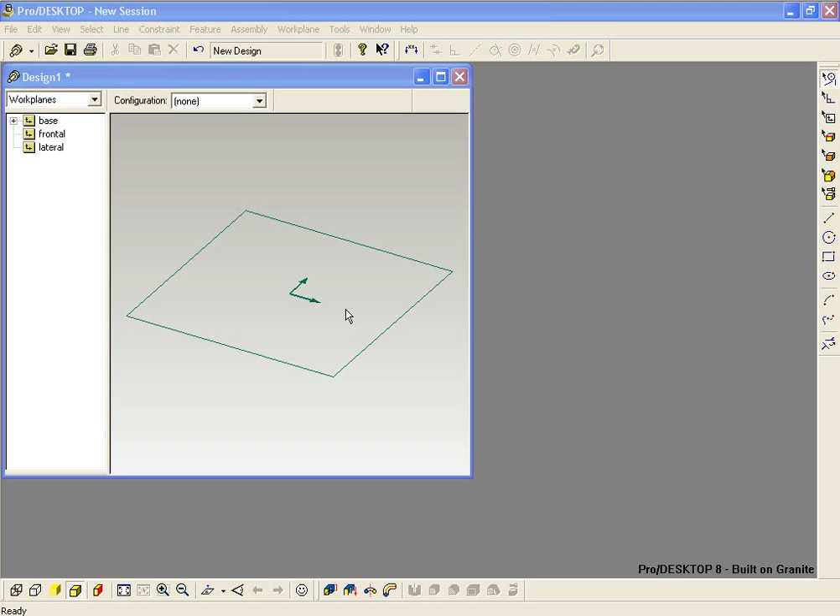First, make sure you have your options set to millimeters. I'll go to units, millimeters, and we're good to go. I'm going to move pretty fast in the initial setup since a lot of it is not new.

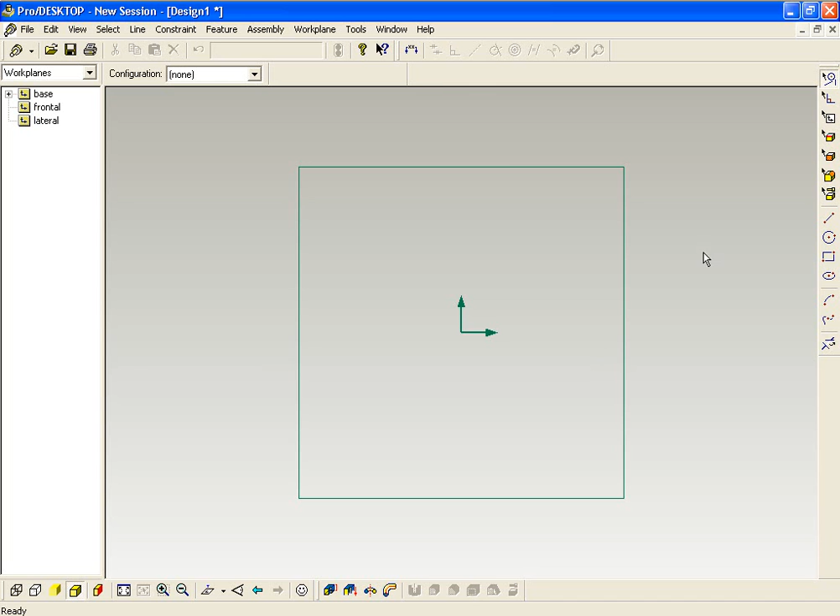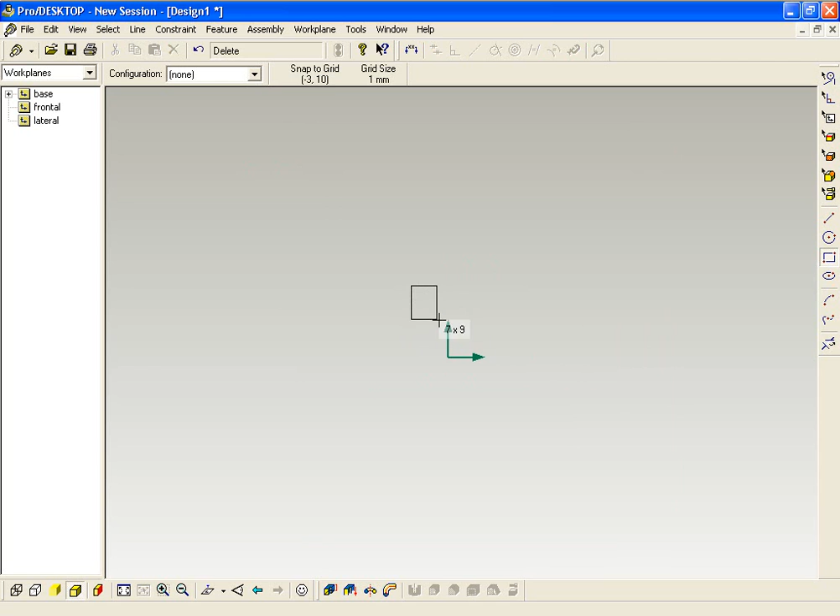I'm going to draw a 16 by 16 millimeter block. Actually, let me Control Z and delete this to show you a different method. I'll zoom in, go to the rectangle tool, and watch the counter. When I get to 16 by 16, I'll stop. It's actually a quicker method.

I'm going to extrude it up 10 millimeters. There we go, bada bing.

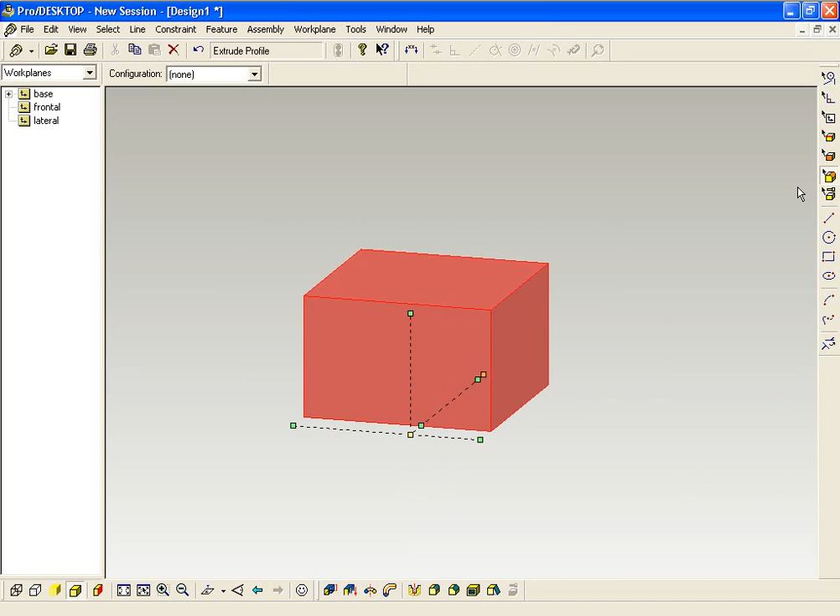The easiest way to take that corner out is with a chamfer. Pick edges, go down and pick chamfer. You're going to do an unequal setback: the top one goes back 8 millimeters, that's the midpoint, and the bottom one goes down 9, leaving a millimeter for the little tiny lip you see. Then hit OK.

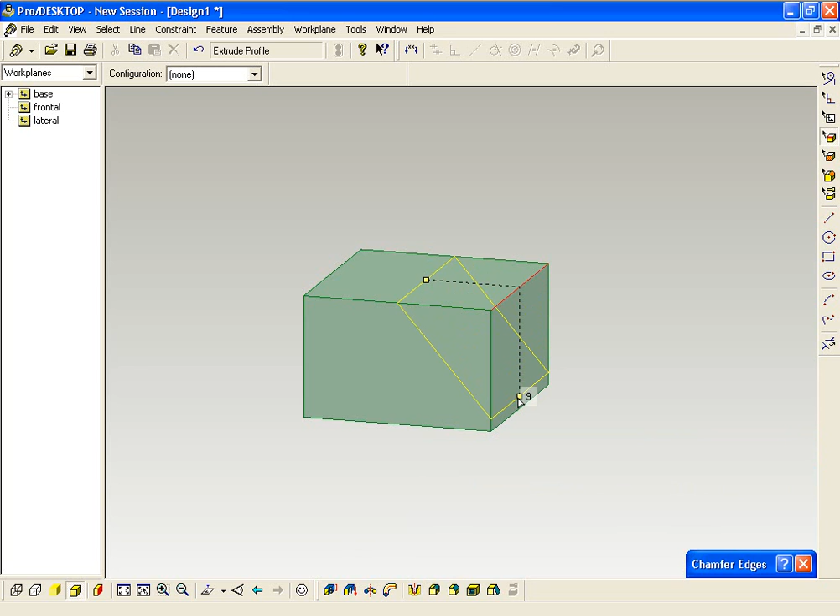That'll take out that front corner.

I'm going to pause and put the dots on, and we'll come back since you've already seen how to do the dots. Okay, and we're back. Just in case you need a refresher, I did two construction lines on an angle to the midpoint, then threw up the 5 millimeter circles.

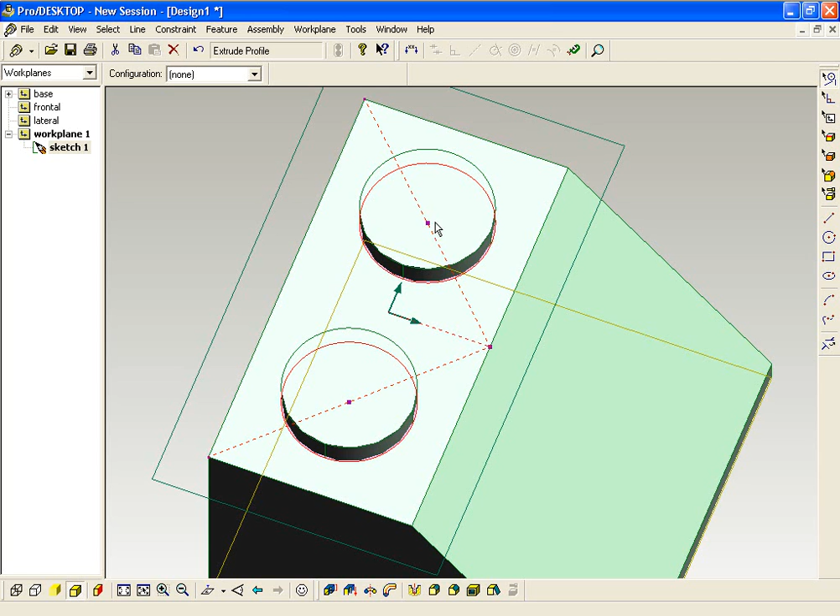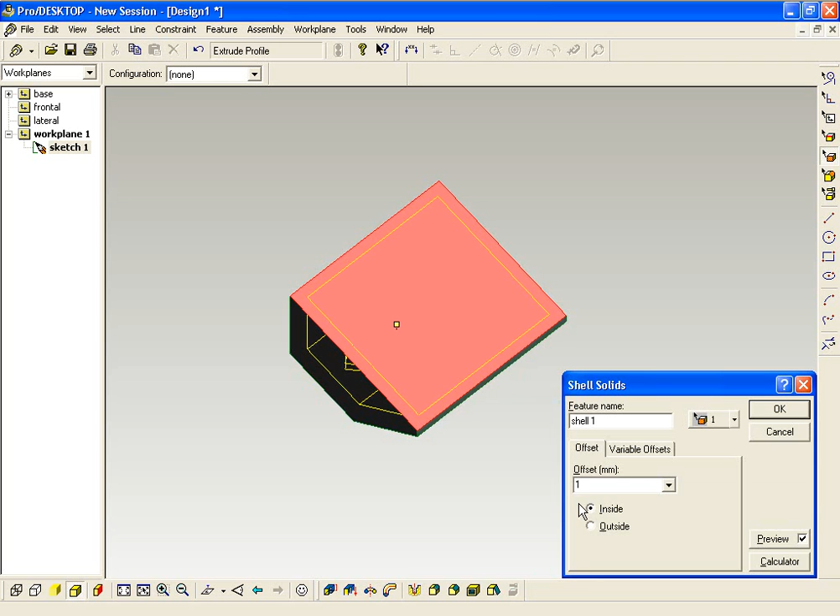Now let's tackle the bottom. I think the easiest way is to apply a shell from the bottom up, and it's different than what I told you beforehand, but I'll show you some advantages. Put a shell on with a millimeter offset, hit OK, and do a quick preview to check we're good. It looks good, and that's very similar to what you'd see in a factory since it's just a plastic mold, and you do see the dots on the bottom of a Lego.

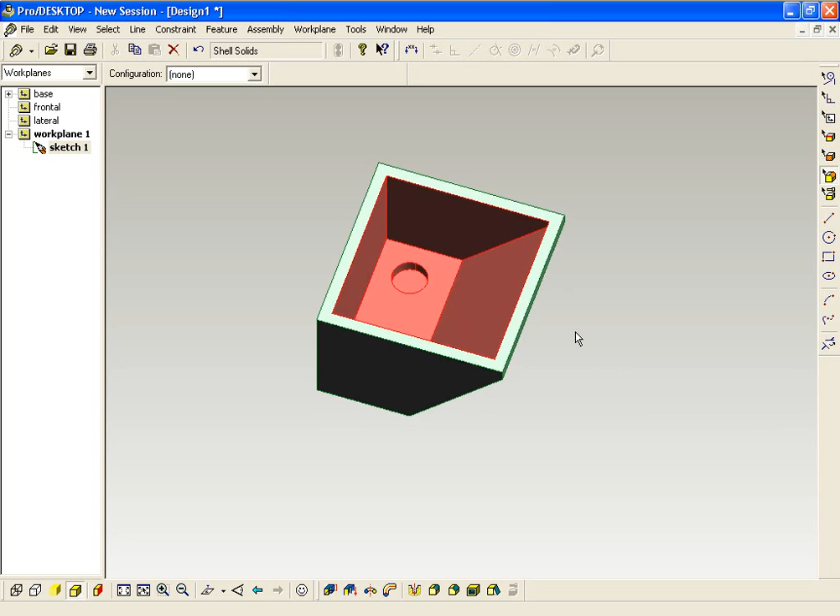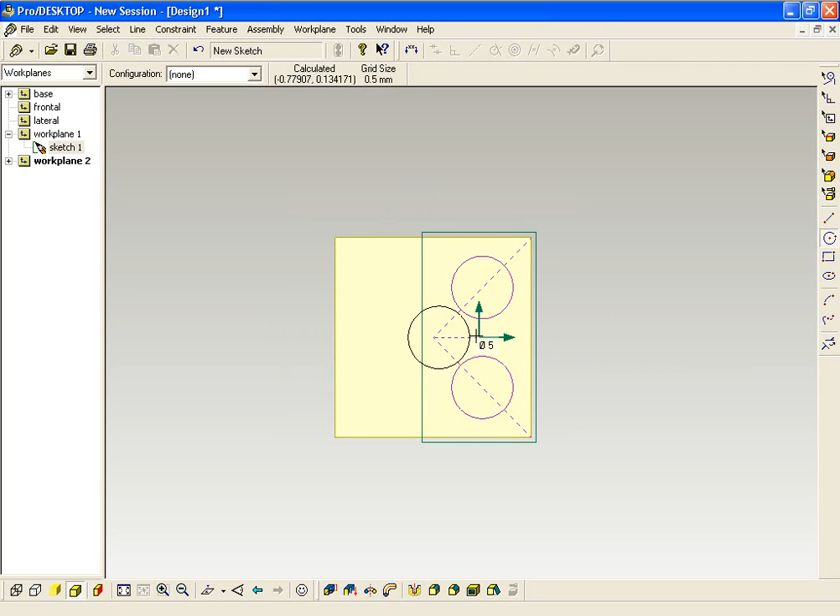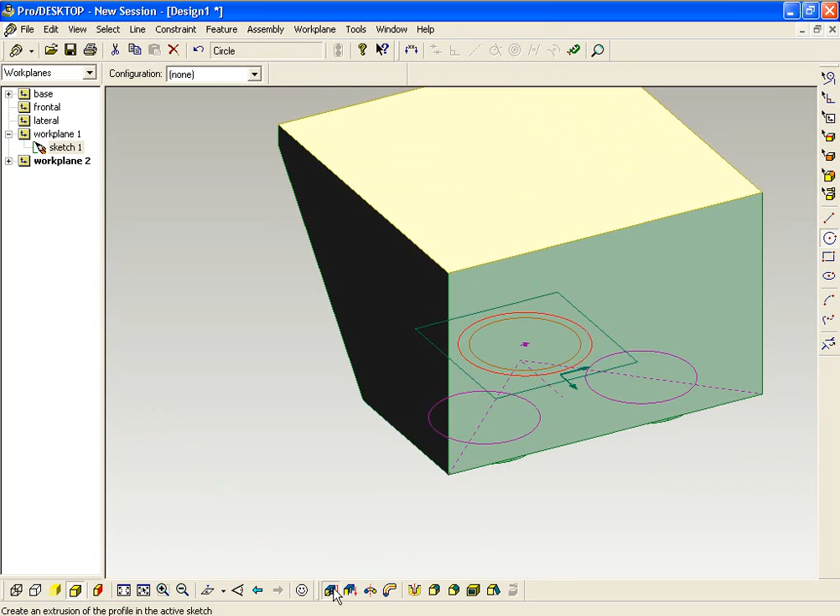So far so good. What about the cylinder on the bottom? I'll select this face and put a new sketch on it, hit Shift W, and throw a circle on here. There's the midpoint, it comes off there, and it's 6 — well, it's 5, and I know the other one is 6. That's snapping to the corner here, that corner line, that's where this circle was snapping to. Then I'll extrude it up the 9 millimeters that it is, and hit OK.

But you have this little lip here that's not very pretty, so I was going to stop this video here and come back in the second video to show you how to take care of that. Or not, I have a minute left, so we're going to do it here in this video.

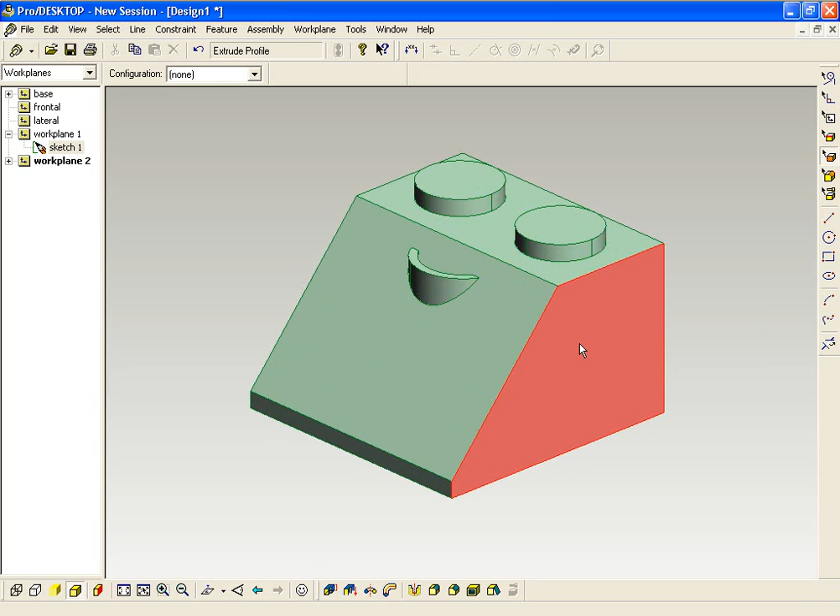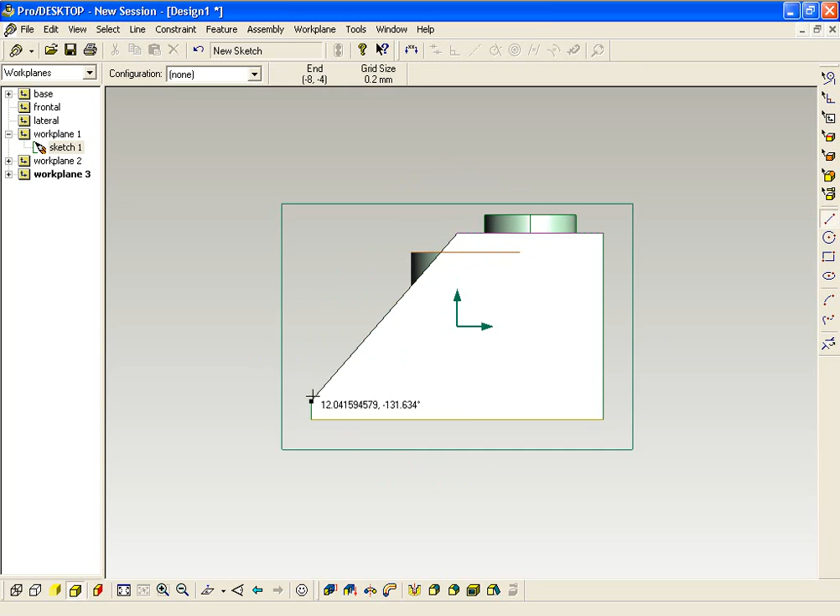To take care of this little cylinder that pops up through the angled face, grab this face and put a new sketch on it. This is kind of reverse thinking: I'm going to create a profile that goes through like midair, and it's going to take out everything that I don't want there. So I'll draw a line along this angle, snapped to that, go straight out here, and straight up here so they touch. I'll trim off the excess on this side, and it should highlight.

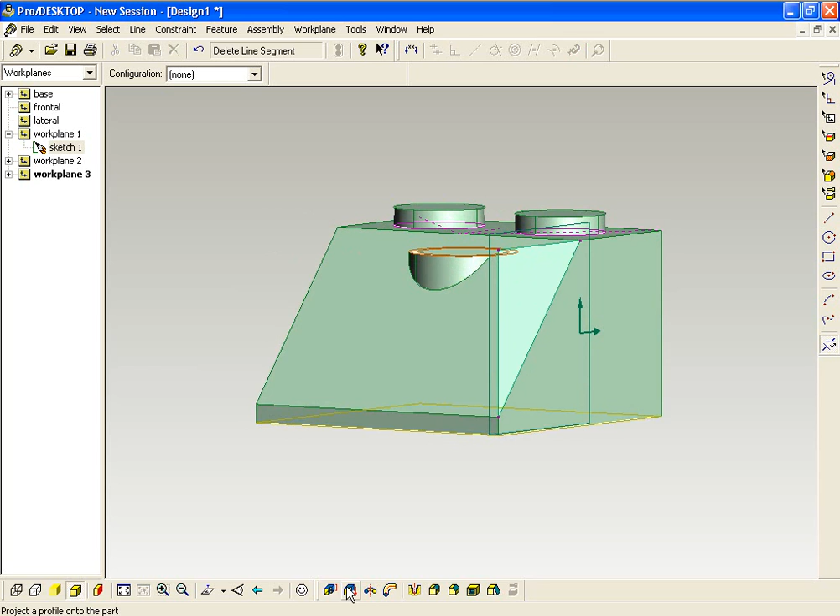Now we're going to use this profile basically like a wipe, sending it across to subtract everything we don't want. Actually, it's easier to do a projection, so I'll do project profile, subtract material, go below the work plane so everything to the left is removed, hit OK, and it'll take everything out. Bam.

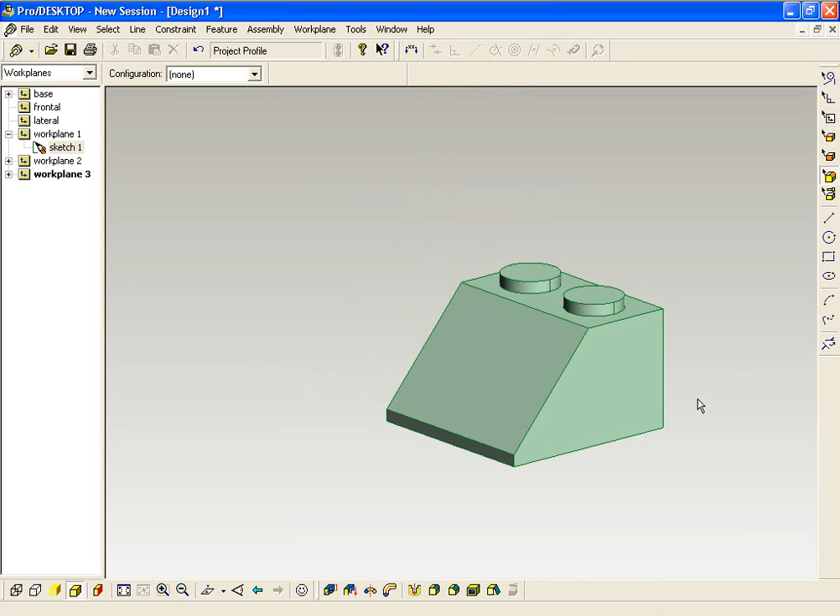We still have the cylinder intact on the bottom, we still have the shell intact, and we have a complete angle Lego block. Good job.